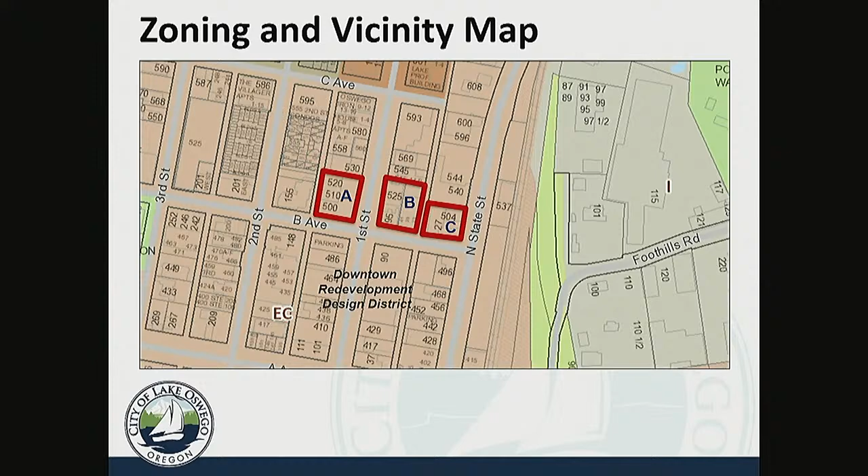Properties in this location have been identified by the city for a redevelopment project for many years. Back when the Lake Oswego Urban Design Plan was originally developed, it called for a convenience commercial district along this area of B Avenue with a mix of retail, office, and residential uses. That's evolved quite a bit since then, but we have a lot of language related to projects of this nature in the East End Redevelopment Plan, which we'll refer to as the EERP moving forward. That includes several conceptual projects that would be addressed with this proposal.

Project H is known as the 1st Street North Anchor Redevelopment Project in that plan. There are also projects that include a State Street mixed-use development as well as a hotel development within this area. There's been some stops and starts with different RFPs here at the city on this particular site, but we have a current proposal to discuss tonight.

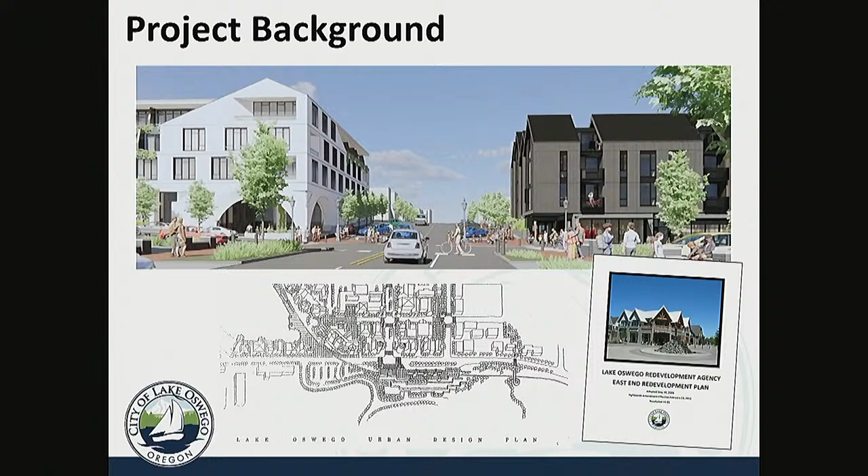So the project includes the following components: a development review permit for an approximately 131,000 square foot mixed-use development across 3 buildings on 3 separate parcels, consisting of hotel, restaurant, retail, and residential uses.

On parcel A, there's a 5-story hotel with 70 rooms, a restaurant, and on-site and on-street parking. On parcels B and C, there are 2 buildings, one in each parcel. The 5-story building is on parcel B, and a 4-story building is on parcel C. Those have 66 residential units in total with retail and restaurant uses as well as on-site parking.

Multiple design variances are being sought as part of this application, really to address multiple site constraints, intended to produce a more well-designed active streetscape given that condition on the site. We'll discuss a lot more about the variances later. In addition, they're requesting 12 trees for removal.

The original request was for 14 trees, but one tree was identified as invasive and will be removed under a separate permit, and another tree was found to be less than 6 inches in diameter and doesn't need a permit to be removed. There will be a total of 154 parking spaces between on-site and on-street parking, several of which would be provided through a mechanized parking matrix, which the applicant is also requesting as part of this variance request. More on the variances later in the presentation.

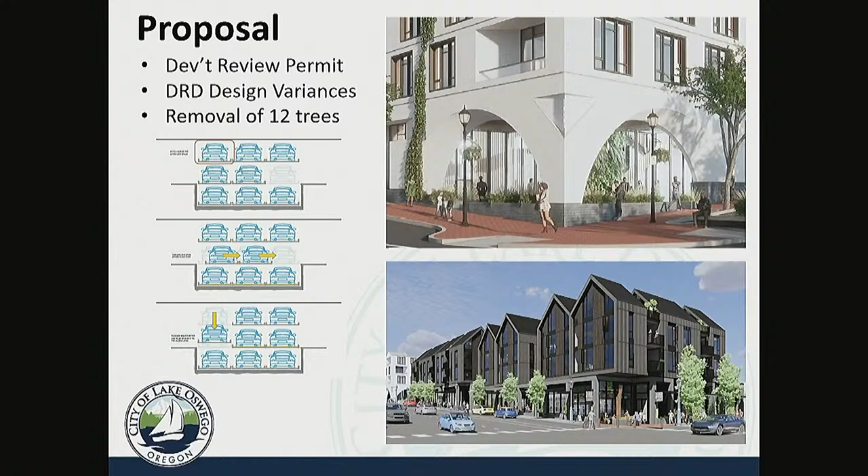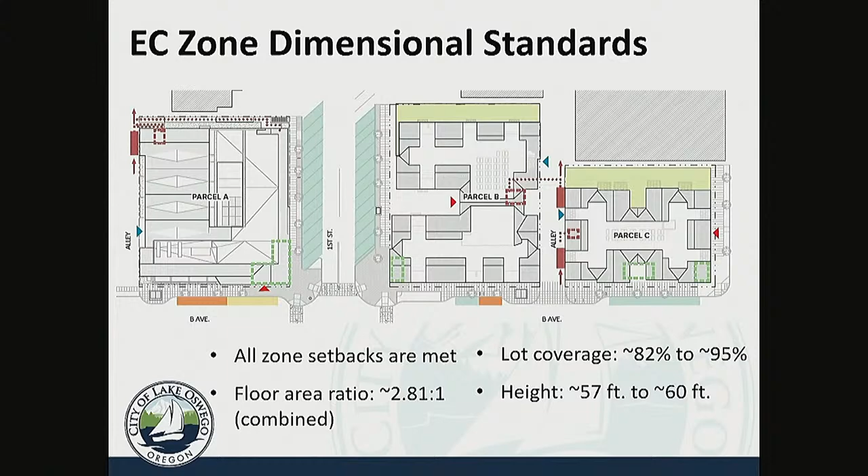The unified site is zoned EC, which has no required setbacks. Lot coverage in that zone is 100%, and the lot coverage for this proposal ranges from approximately 82 to 95 percent. The floor area ratio maximum in the EC zone is 3.32 to 1, and the proposed overall floor area ratio across the 3 parcels is 2.81 to 1 — that's the average, though it can be broken down per parcel. Building heights range from 57 to 60 feet depending on the parcel, with 60 feet being the maximum height in this district.

The proposal includes 3 new driveways, all accessed from alleys and compliant with access and on-site circulation standards for emergency access, slope, cross slope, and landings. There's ADA compliant pedestrian circulation between interior uses and exterior spaces, and voluntary dedications of additional right-of-way space with upgrades to the public sidewalk.

So this addresses the development standards really quickly. We'll go more into the dedications later. Stormwater is proposed to be managed on site, and the applicant is also proposing new crosswalks and curb extensions at the intersection of 1st and B Avenue.

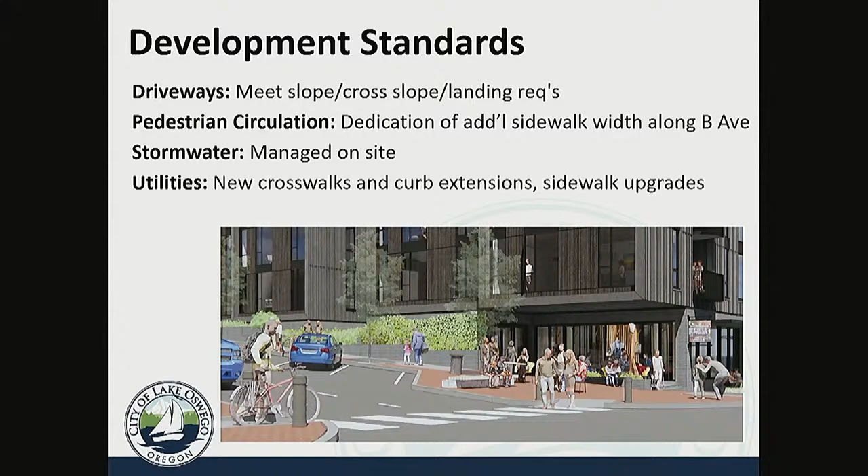I wanted to quickly remind folks that the applicant submitted revised numbers for the number of parking spaces provided, so that should be accounted for in the numbers I'm discussing tonight. That's mainly a revision to the numbers on parcels B and C. I'll go over those in a moment, but those were addressed in exhibits E46 and F15.

On parcel A, which includes the hotel development, there's a minimum of 63 parking spaces required. They provided 64 spaces, 47 of those in a matrix system, with the others provided off-street.

On parcels B and C, they proposed 90 spaces, with 87 spaces actually required on those 2 parcels. Those would be 53 garage spaces, 14 off-street spaces, and 23 within the matrix system itself.

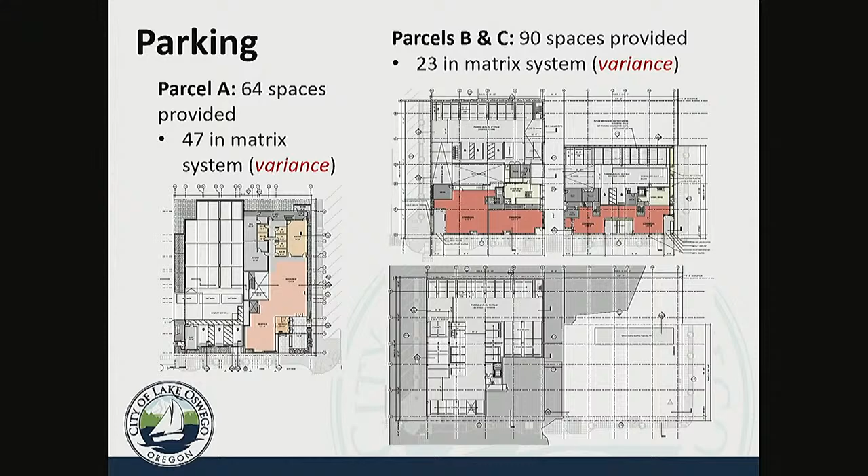In terms of street improvements, the applicant has proposed to dedicate an additional 2 feet along parcel A, resulting in a 10-foot wide sidewalk, and an additional 4-foot dedication on parcels B and C, resulting in a 12-foot sidewalk, going up to 15 feet along the State Street frontage. There's a required setback of 3.5 feet along that frontage.

The applicant is also proposing a number of pedestrian courtyards that would feature public art, benches, pedestrian-oriented plantings, trash receptacles, and bollards at the corner of State and B.

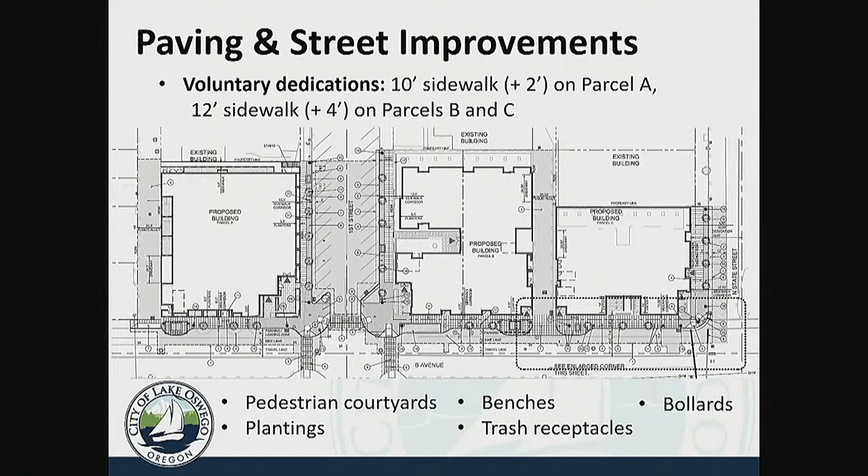On the next 3 slides, I'll go over the downtown redevelopment design standards. I'll try to note when a variance is requested, but we'll directly cover those in detail later in the presentation.

This first section covers building, siting, and massing, the first slide of the DRD standards. One thing you'll note is that the applicant has taken different approaches on parcel A versus parcels B and C. There's a unified design on parcels B and C that addresses the criteria somewhat differently than the proposed hotel development on parcel A. I'll try to do my best to delineate between the two.

On parcel A, the applicant has proposed a 5-story building, which would require a variance. They've included a strong corner that's articulated and highlighted by an archway at the corner of the hotel building.

On parcels B and C, there's again a 5-story building proposed on parcel B, and only 4 stories on parcel C. But those corners are similarly activated by public courtyards, taking a different approach to highlighting the prominence of the corner by using public art and activating that streetscape in general.

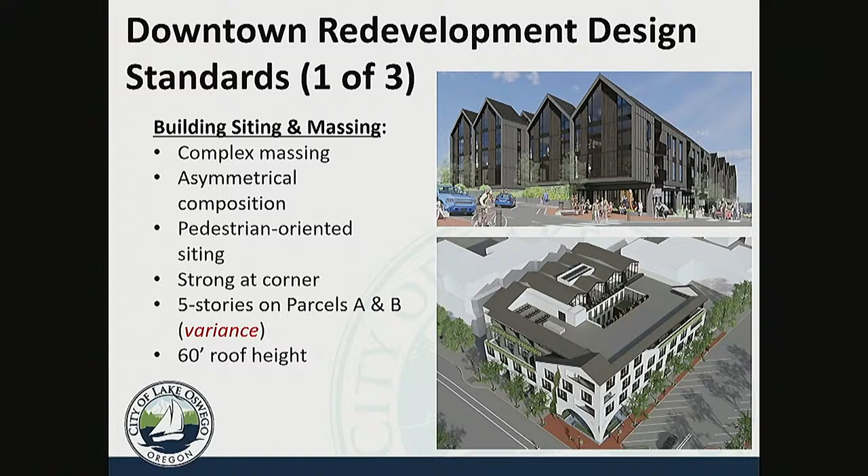In terms of building design, on parcel A the hotel is designed as somewhat of a modern interpretation of the arts and crafts style, something the applicant will speak more about later. We found that the proposed building on parcel A has an architectural form that mimics a steeply pitched gable roof, creating a sense of the roof sweeping down closer to the ground on one side than the other.

There's an asymmetrical composition used in the hotel, a contrast between a rectangular building form and a sloped, projecting building form emerging from that rectangle. It also uses a round arched opening to mark the entry to the hotel, another characteristic element of arts and crafts style. In terms of the mixed use residential and retail buildings on parcels B and C, those were designed in another interpretation of the Oregon Rustic style.

So that uses multiple moderately pitched gable roofs that are articulated with A-frame-like facades, as you can see in the image.

It's an asymmetrical composition on the plan view. It's kind of H shapes that are not necessarily symmetrical in their orientation, responding to the topography and providing different experiences to the pedestrian.

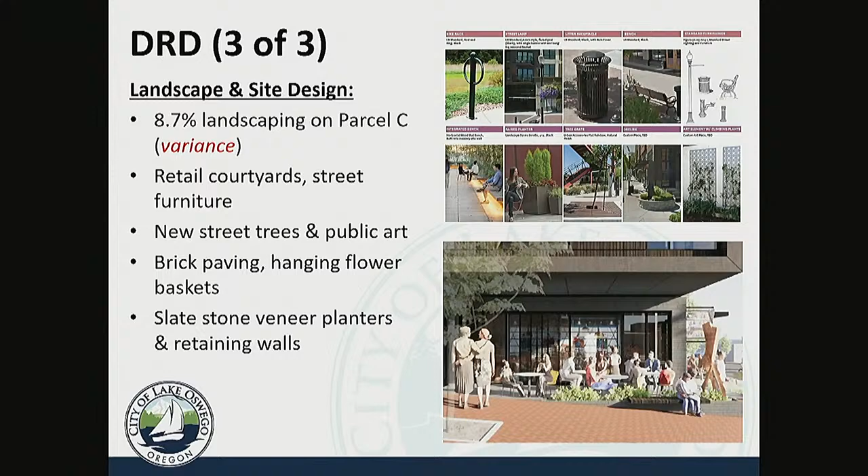All right, so now to get into the variances requested by the applicant. These are, sort of the 5, we'll focus on 2 of those to start with. These are variances that are subject to the general design variance criteria, a bit different than the ones subject to the DRD specific design variance criteria, which we'll talk about next.

So these first 2 variances: the first one would be a reduction in the required landscaping on parcel C. I had just mentioned that would be 8.7% provided. The second one would be the use of a mechanized parking matrix system to provide required parking spaces.

I think one commonality that ties these issues together, or one thing that led to these requests that is the same for each, is that there's a bit of a difficulty they've found with producing a design that really highlights the city's desired program for the North Anchor site and the vitality of commercial uses, the prominence of the hotel, while still working within the constraints of the site, the size of the site, and the topography of the site.

So those are 2 things that really influence these requests for variances, and I'll get into a lot of the other arguments next.

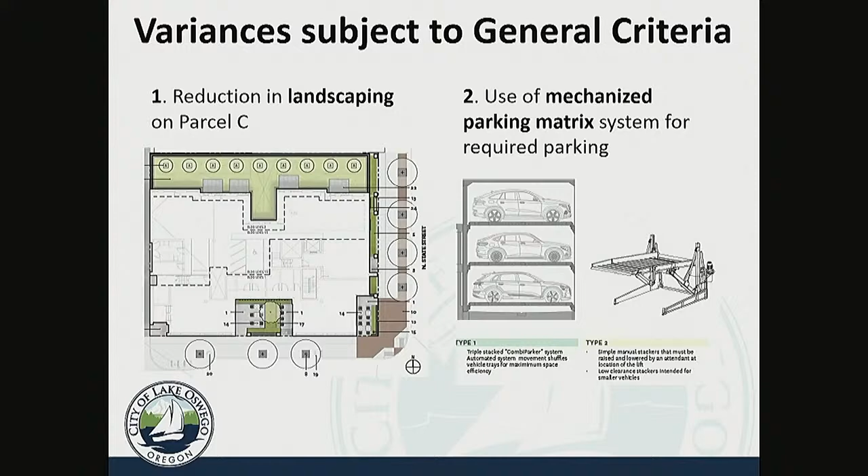So we found that both variances met subcriterion A2, which is essentially that they better accomplish the purposes, goals, or objectives of the base district and any adopted plan or overlay district. The East End Redevelopment Plan, or EERP, contains a number of objectives designed to ensure economic vitality, encourage intensified residential housing development, improve the pedestrian shopping environment through street landscaping, and has other objectives carried forward in other parts of the project, including Project J for the North Anchor development, conceptual ideas for a mixed-use project and retail along State Street, and a hotel project.

So we found that the variances better accomplish those particular goals by prioritizing the density needed to fulfill the vision in that plan and other urban design plans developed for that area. The design on parcel C emphasizes street landscaping, as you can see in the design of the State Street frontage here, using canopy-like plantings to screen the parking behind and encourage a more active streetscape, considering they needed to fit the parking somewhere in the building. That seemed like the best way to handle it while still producing an active and vital streetscape.

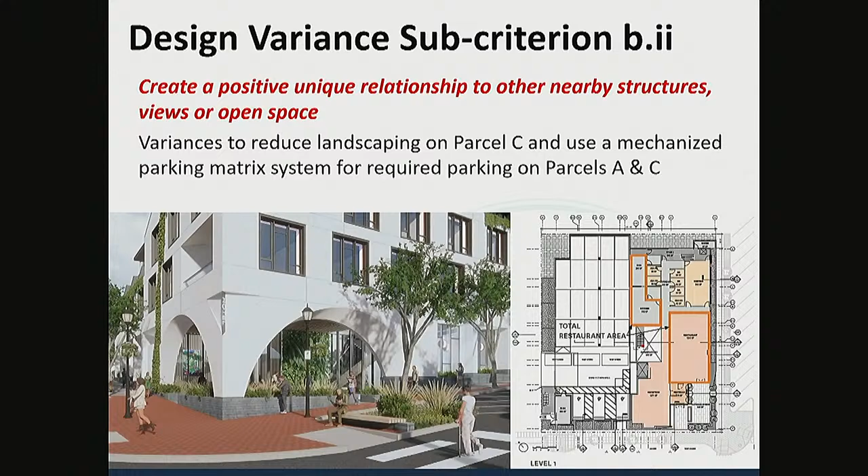All right, and so that covers the variances subject to the general design standards. So I'll move into the variances that are subject to the criteria within the downtown redevelopment design district. It's a bit different.

This covers the request for 5-story buildings on parcels A and B, the reduction in storefront appearance related glazing requirements on certain frontages of each of the three parcels, and there's also a request to allow the use of stucco on upper stories of parcel A, the hotel building.

So again, a lot of these design moves are really to accommodate the desired mix of uses and program envisioned for the site. Considering that it's a relatively small site with a considerable amount of topographical grade change, you can see even in this slide a significant jump in height along that B Avenue frontage of the Parcel A hotel building. That creates a bit of a challenge for some of these issues.

So generally these are attempts to respond to the site, trying to make it as active a use as possible while still fitting in with the downtown environment and maintaining that rhythm of the streetscape.

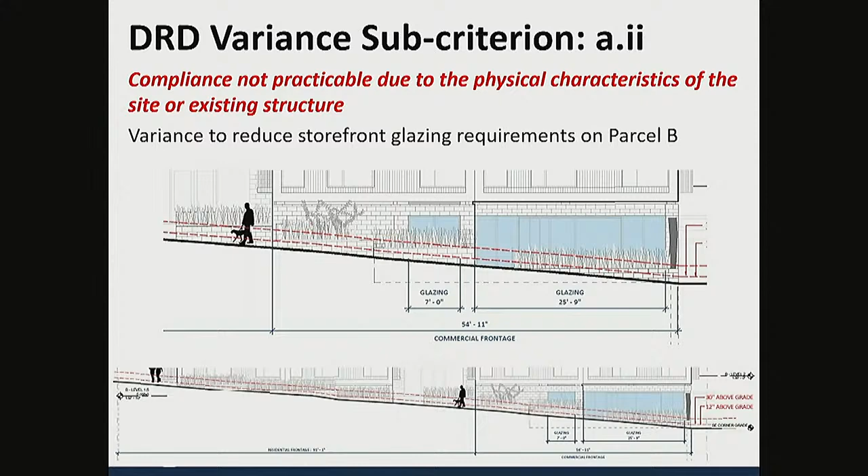For the other requested variances, we thought the best argument was that they really better accomplish the objectives of the EERP as well as the urban design plan. Again, we're talking about the variances to allow a 5-story building, reduce the glazing requirements, and use stucco on the upper stories of the hotel in particular.

As we've mentioned before, this allows for a sculpted massing that opens up certain views of Mount Hood. The 5th floor in particular opens that up for guests of the hotel, and there's also a walkway on the northern portion of the site where additional views can be had.

It also provides active hotel uses along prominent frontages and increases the vitality of the district by providing that distinctive building form I was gesturing about earlier. It really tries to allocate the FAR allowed within the district and height limit in ways that maximize active use along the pedestrian frontages.

The storefront appearance variance also screens the parking garage and allows a higher density of uses. These work together in certain ways to make sure it can be an active use for the hotel and really encourage that storefront vitality.

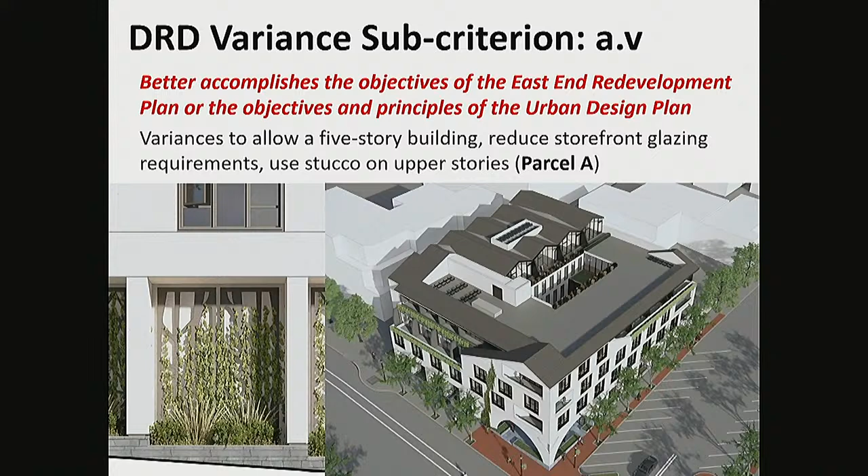When it comes to parcels B and C, we found that they better accomplish the objectives of these plans in various different ways. So the 5th story on parcel B, we found that's really able to allow a certain building form, and by using the site the way that they have, and by using that 5th story, they're able to get a much more reasonably sized ground floor on the B Avenue frontage.

The applicant has a few diagrams that show what would occur if they were to produce just a flat 4-story building within the height limit, which could reduce the pedestrian storefront height quite a lot. So it does produce a more intimate and appropriately scaled storefront experience, and it directly addresses some of these objectives to support the creation, as stated in the EERP, of a 24-hour downtown with a high level of activity.

A lot of this has to do with the specifics of how we defined a story in the development code. There's a significant slope on the site that creates a condition in which the vehicle and service areas can tuck into the higher end of the slope, allowing daylighting of the retail spaces along the B Avenue frontage. The variance would allow for 4 stories of residential units while still having parking underneath it on the upper portion of the site. So it might not actually read as a 5-story building except in very unique, isolated areas of the property.

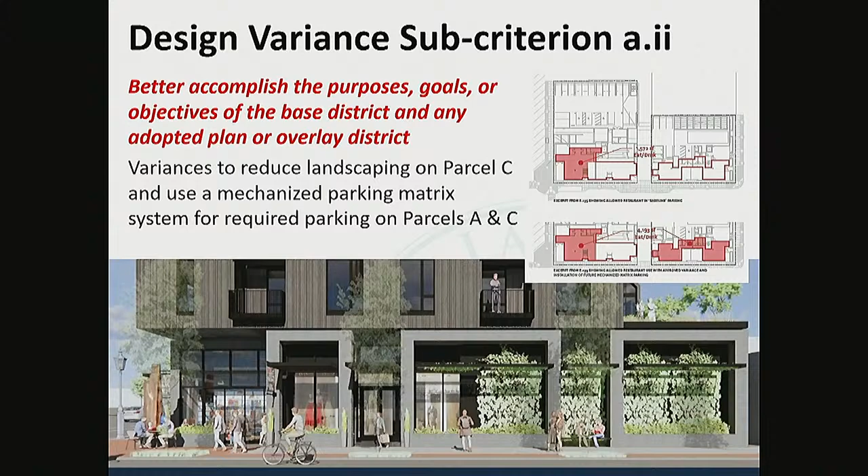There's also slate stone veneer cladding and a rhythm of framed openings that's intended to tie into other portions of the site. Those little openings and niches created in the facade are intended to contain artist-designed, laser-cut steel panels that will essentially serve as trellises for plantings to grow onto.

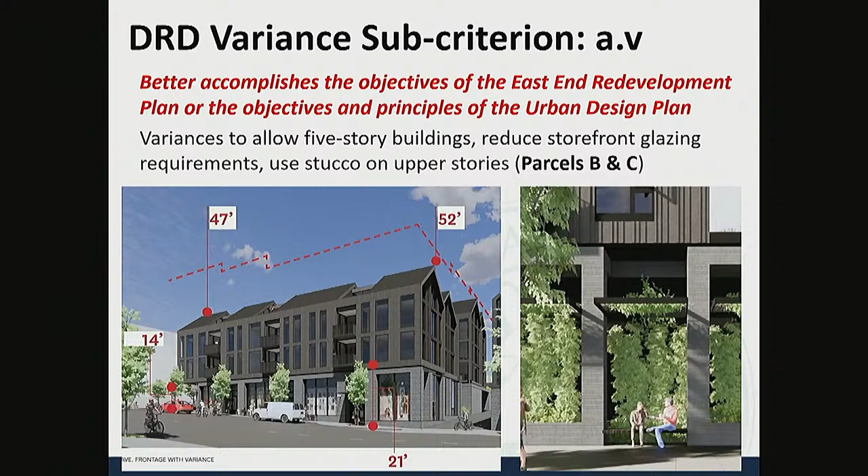For Parcel A, going back to how we found that it complied with sub-criteria B1 and B2, the proposed variances created a positive, unique relationship to other nearby structures, views, or open space and streetscapes, and they're exceptional in the quality of detailing, appearance, and materials. The variances accomplish this for many of the reasons already discussed. The 5th story responds to the topography and creates new views that contribute to the asymmetricality of the proposed building.

It also has a voluntary setback, pulling back 10 feet from the northern property line, with the idea of maintaining views for the existing neighboring building at 555 2nd Street of Mount Hood. So that's designed to be a bit more sculpted to the unique environment of the adjacent properties, creating that positive, unique relationship to nearby structures and preserving views from adjacent buildings per the variance criteria.

The storefront treatment along B Avenue in the hotel really activates the streetscape with similar types of metal, cut-steel landscape trellises. Similar to what you see on State Street, those screen the parking behind it in order to allow for a hotel ground floor configuration that locates the most active uses on the corner. So instead of windows that would just look into the parking, they provided more landscaping and artistic features in these areas.

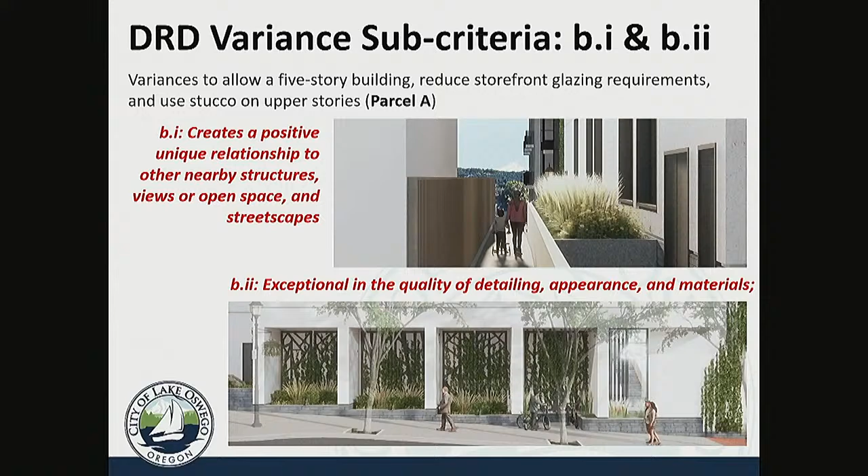So I'll close the variance discussion with a brief overview of how the proposal on parcels B and C addresses these same criteria. We found that the fifth story produces a more inviting retail storefront height in response to topography along that B Avenue frontage, in the most successful way they probably could in this circumstance. It helps produce a higher quality design by creating a ground floor height that allows for an enhanced pedestrian environment along that prominent frontage. Without that, it would either be an oversized ground level at the lowest point along B Avenue, or a very tall or very small frontage, depending on the design. So this is somewhere nicely in between, hopefully.

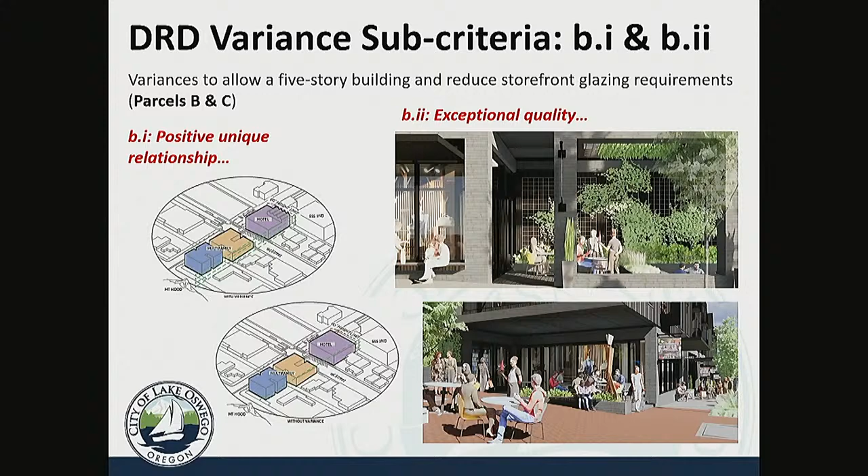Again, the screens used on that State Street frontage are similar, with laser cut panels that will allow shade to pedestrians. They're actually vertical plantings designed to create a canopy in and of themselves. So there will be landscape and art on that frontage, similar to treatments elsewhere on the site.

To go over tree removal quickly, they needed to remove 12 trees for on-site construction and sidewalk improvements. It's a constrained development area, so there were no reasonable alternatives. There would also be one invasive tree and one small tree shown on the plans that would not formally need to be part of the proposal as approved.

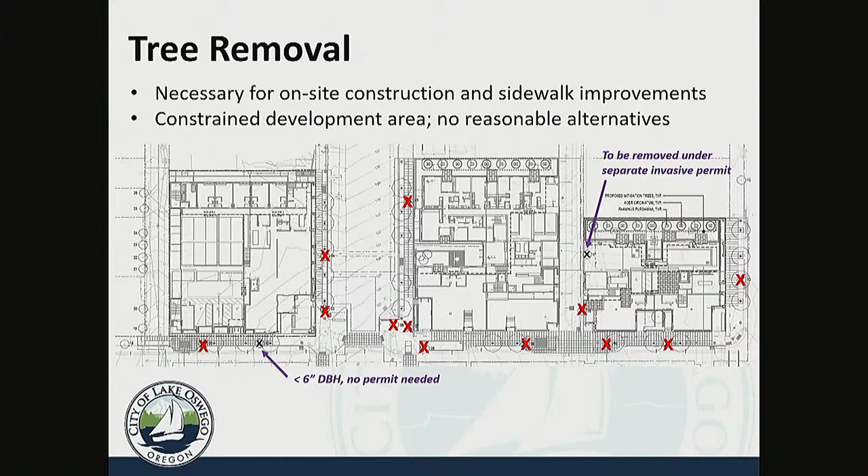And so that should cover it. The recommendation from staff is to approve as conditioned. Thank you, Eric. Are there any questions from the commission to staff?

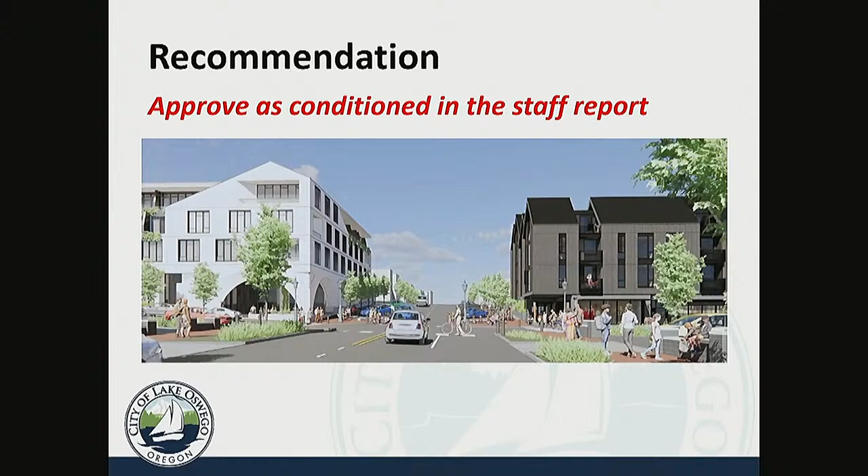What are the peak heights along the roof line of each of these, and what are the acceptable limits? They have obviously a number of peaks, so there are different heights. The tallest of them is 60 feet, the way we would judge it, but there are a few that get pretty close. There might be more than one peak at 60 feet in height, but it is right at the maximum.

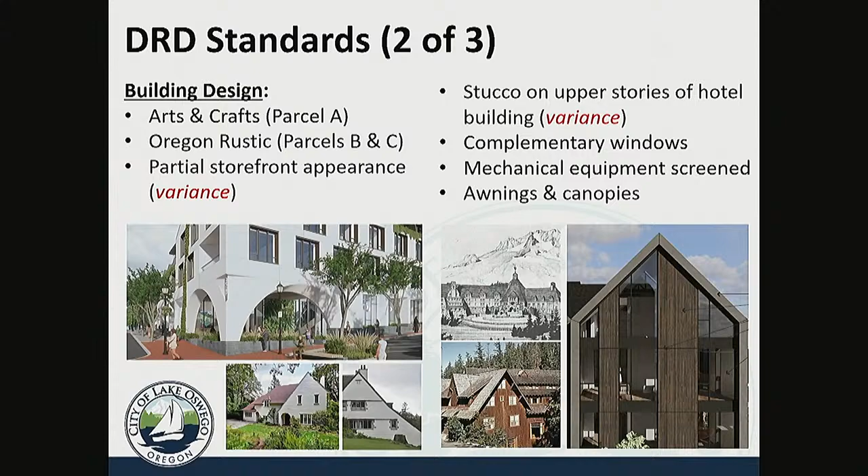Yeah, that's something the applicant might be able to speak to more regarding their inspiration and how they drew that connection to the arts and crafts style. I'd say the use of arched openings is a pretty prominent feature. There are images showing some fairly prominent local examples of arts and crafts buildings, like on the bottom left of this slide, where they utilize that steep pitch and the idea of sloping down from that pitch, with the pitch projecting from another building form. I think that's really the type of arts and crafts building the applicant is seeking to create. There's a lot in the code that would prevent this particular interpretation of arts and crafts that's included in our appendix as examples, because the DRD requirements would require different materials on the upper story. So the idea is to create a more unique interpretation of that arts and crafts feature, one that's still a prominent version of what people typically mean by arts and crafts buildings, which wouldn't be possible otherwise through the DRD code.

In terms of color, it's worth noting that it is lighter than many of the buildings nearby, including the other building on parcels B and C, and I think that was a deliberate decision. There's certainly a lot of abstract inspiration, as you alluded to, with the mountains and the idea of being carved out of a large form, which the applicant would be the best party to speak to further. But as for the arts and crafts portion, I can say it's a unique interpretation of that style. That's what we saw, but we were able to see the inspiration for it and its connection back to a lot of prominent examples of that style.

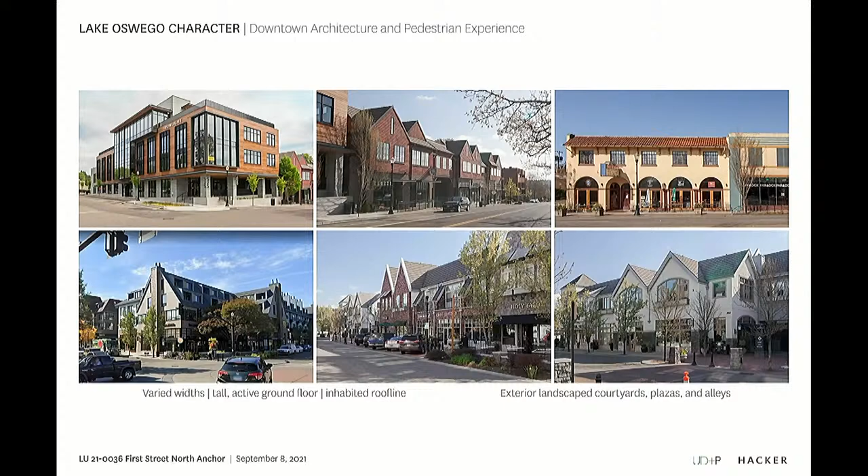Many of the buildings have tall, heavily glazed ground floors that promote very active pedestrian streetscapes, usually around a 14-foot to 20-foot tall ground floor reading - so a very nice public scale, but not overly sized. And then sites are punctuated by a variety of outdoor seating spaces and landscape courtyards, plazas, and alleys.

The buildings work together to reinforce and complement some of the existing patterns of the district, particularly the ground floor architecture, to create the most engaging pedestrian experience we can on the site.

I'll touch on this quickly - I know some of this was already covered. The right-of-way improvements in general include significant improvements on all frontages, in efforts to bring the level of pedestrian safety, activity, and the general character of the sidewalks to the same level as you see in some of the more redeveloped areas of downtown, particularly around A Avenue and First Street and the Windward and Lakeview Village. This includes widened sidewalks, new street trees at a denser spacing, bulb outs at intersections and alleys for pedestrian safety and furnishability, and specialty inlay paving along First Street.

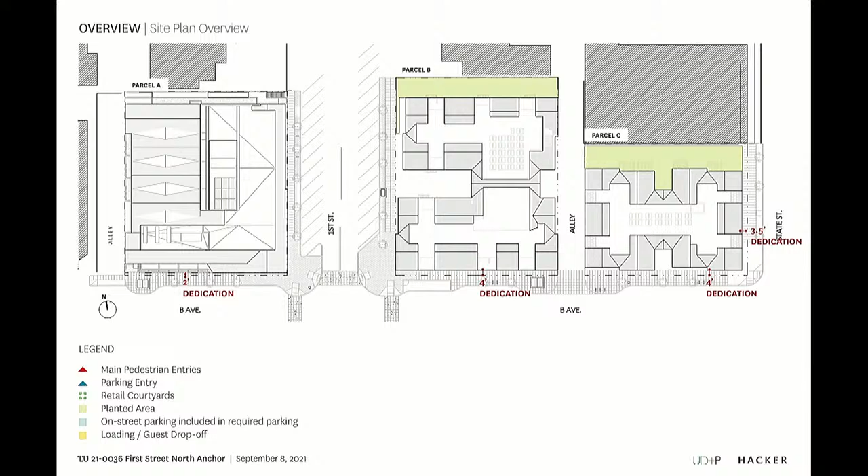This ground floor diagram shows that we tried to locate program to activate all the pedestrian frontages with commercial storefront and active plazas and courtyards. At the northwest end of the site, shown in blue, we represent ground floor residences, landscaping, and terracing landscaping adjacent to the sidewalk.

We're providing structured parking on site for all the parcels, and we've carefully located the parking and building services to be accessed off the alley and away from the pedestrian frontages as much as possible. Due to the grade change, these parking garages are buried at the north and northwest ends of the site.

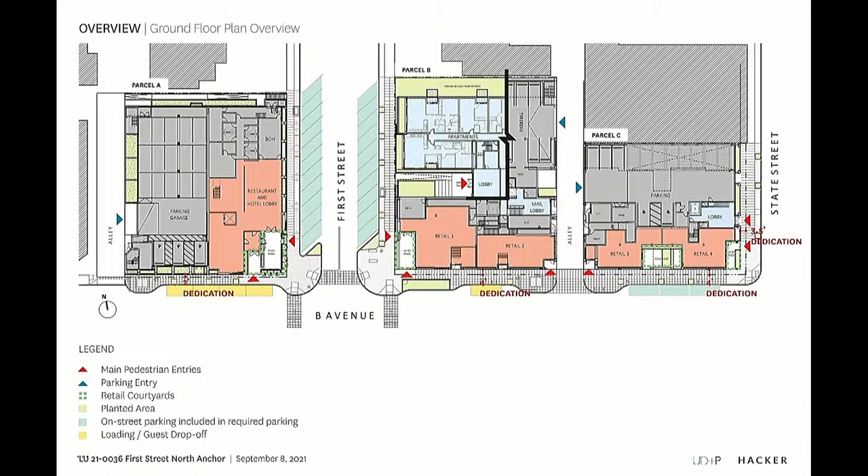Those levels actually daylight as full stories at the retail along B Avenue, so we've lined that with retail space as much as possible. The two exceptions are a portion of the hotel facade along B Avenue and a portion of the State Street facade on the far east. In those locations, we're utilizing a mixture of specialty landscaping and art screening, which we'll talk about later.

The architects who invented and authored this style were looking for something new, an architecture they believed had more meaning, authenticity, simplicity, and utility. Importantly, they held a strong reverence for nature, community, and family. The buildings were often where the public could come together, congregate, and admire our country's most impressive natural surroundings, and the architecture was intentionally designed to harmonize with and fade into those surroundings.

Given the remote sites these buildings were built on, they were often intentionally utilitarian and efficient in floor plan, material, and detail. One hallmark of the style is authentic use of plan and structure - an efficient floor plan laid out on a rugged site to best take advantage of views often had the visual effect of asymmetry in the form, another hallmark of the style. Similarly, varied roof lines provided weather protection, but more importantly reflected authentically the scale and use of the rooms within.

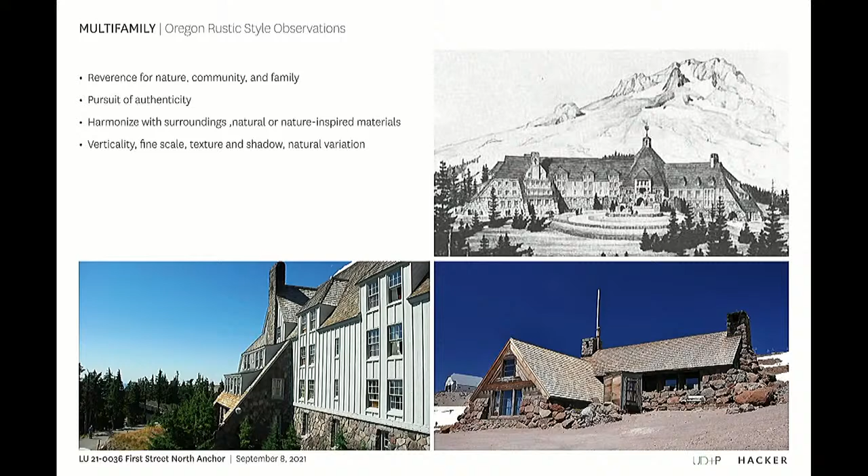Both multifamily buildings are utilizing a similar architectural style. However, we've varied the orientation of the roof lines and the courtyards to allow them to uniquely respond to the topography and create a variety of pedestrian experiences at each street.

The overall material palette of the building is directly inspired from Oregon rustic architecture, with warm neutral colors for the upper floors and natural tones. Upper materials are primarily a tightly spaced fiber cement board and batten siding with black commercial grade vinyl windows, and at the gabled ends, the rich color of stained true wood siding. This unique, tighter spacing of the battens provides a modern take on the texture and fine scale reminiscent of the historic residences and industrial buildings of the Oregon Iron Company, as well as the board and batten siding of Timberline Lodge.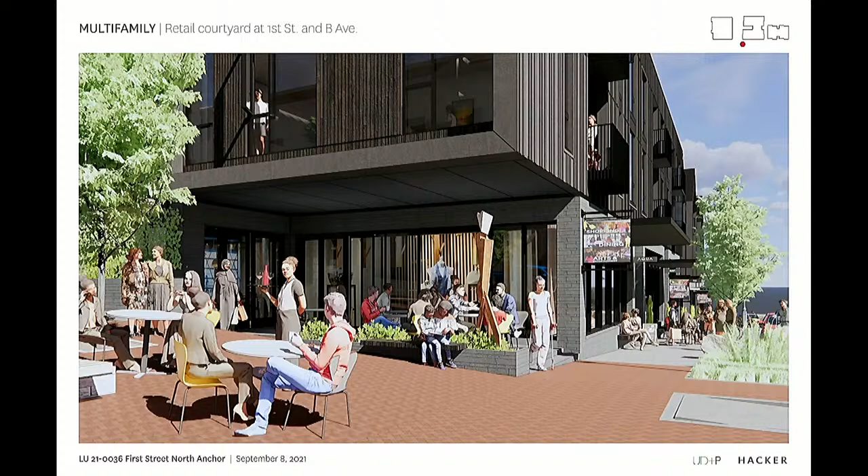Apologies, I skipped forward one slide.

This shows the retail courtyard at the corner of First and B, and we have a similar courtyard at all the primary intersections. With this grand architectural gesture, we're providing all-season outdoor seating adjacent to the retail that's open to the sidewalk, but under the cover and protected from above by the building.

Here we're showing a low planter with integrated seating on the public side, and a sculpture at the corner, which maintains openness and visibility to the courtyard but holds the corner and allows a transition between the sidewalk grades.

At the corner of State and B, we're providing a similar courtyard but at a different scale, as you can see here, just due to the grade change. Between these courtyards, they're connected by a rhythm of stone frames, storefront windows, and secondary retail entries, which continue all the way from the southwest corner at First along B Avenue and wrap the corner for the entire frontage of State Street.

It's important to note that the variance on Parcel B for the number of stories is allowing us to maintain a 14-foot to 21-foot ground floor height, which is consistent with patterns within the district.

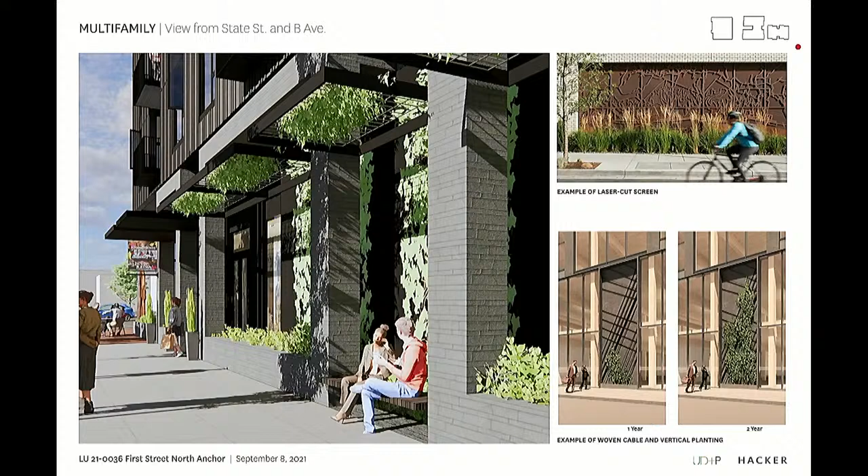And with that, I'm going to hand off to Scott Barton-Smith to describe the hotel.

It looks like we have very little time. May I take a few more minutes beyond the 20 minutes? Sure, go ahead. All right, appreciate that. Take 3 or 4 minutes more. You had trouble at the first.

All right, I'm Scott Barton-Smith, and I'm going to give you a tour of our proposed design for the hotel. Hopefully this will answer some of the questions that came up.

When we were thinking about a hotel, it is intended to cater to visitors to your community. And therefore, it really wants to be something that is readily identifiable and locatable for visitors that are just rolling into Lake Oswego, say from State Street or from the South Anchor.

Another way to say that is a hotel really wants to be an extroverted building, in that it wants to feel natural in its community, but also wants to stand in contrast somehow to its surroundings. So when we started to think about the design of the building and to look into the planning requirements, we were trying to find a way to make an extroverted building in the hotel.

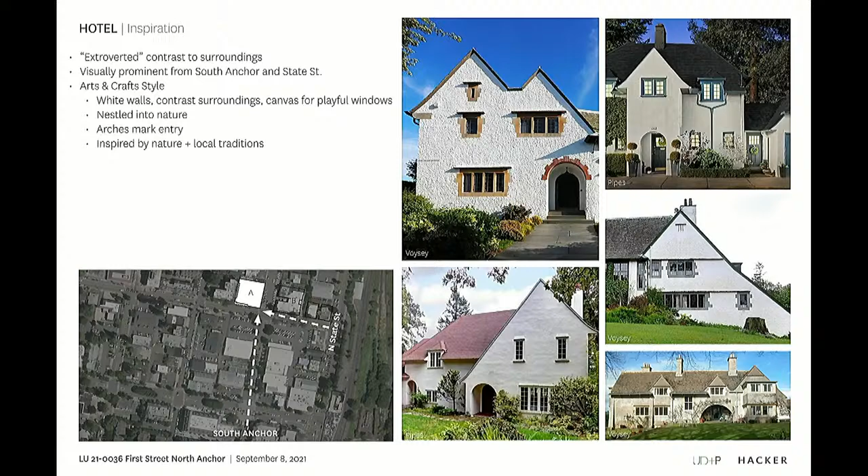So that seemed very appropriate for our hotel building. The other aspect that we really liked about arts and crafts was that it was inspired by nature and local traditions. We love that because we find that buildings are always better when they give people a connection to the landscape and a connection to the community that they're within. So when we're thinking about the arts and crafts building, we're also thinking about a connection to landscape and a connection to Lake Oswego.

When we're thinking about a contrasting material for the roof and for the stone veneer at the base of the building, we're also thinking about the geology of the Willamette Valley and basalt.

When we're thinking about that concentration of detail that the arts and crafts architects like to do at the openings of the building, we are thinking about the local traditions. As Chris mentioned, the lumber industry that was historically here in Lake Oswego and the iron industry. So we're seeing a concentration of detail at the windows that brings warmth of wood and the contrast of dark metal.

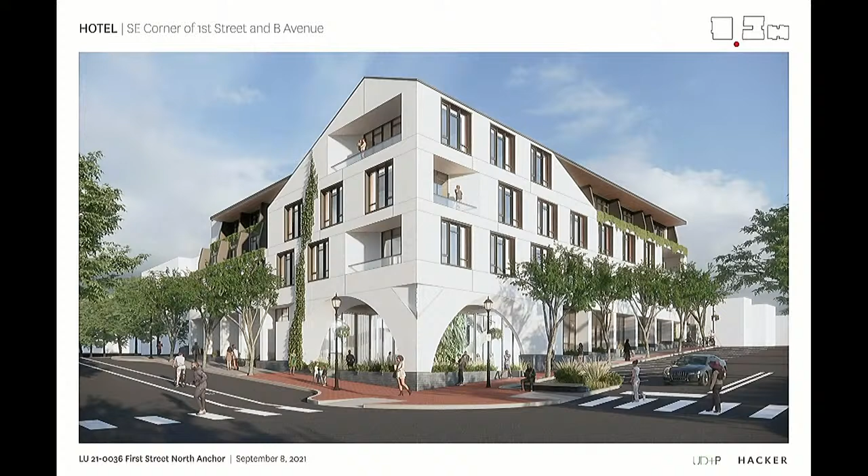And so this is probably the most extroverted corner of the building. This is from the southeast corner. You'll notice a mountain motif here in the white stucco that really culminates at the corner and is really anchored by these entry arches at the corner of B and First.

You'll also notice that the upper stories, although they are all stucco, are recessed with balconies. The intent of the upper story material change in the code is to soften the upper stories. We believe we're achieving that better by literally setting back upper stories, which allows them to recede in space and really focus attention on this mountain motif in the corner.

Some other things you'll notice from this image is that the ground floor windows are set deeply into alcoves that are landscape planted. The arches and the balconies within that mountain have beveled surfaces. All of that contributes to making the white stucco feel more than a 2D surface, making it feel like a thick surface, like a carved object, as you mentioned, Mr. Smith.

You'll also notice that the windows are organized not in a grid, but in a staggered pattern that kind of points towards the peak of the mountain. So it was really important for us to introduce those staggered window patterns.

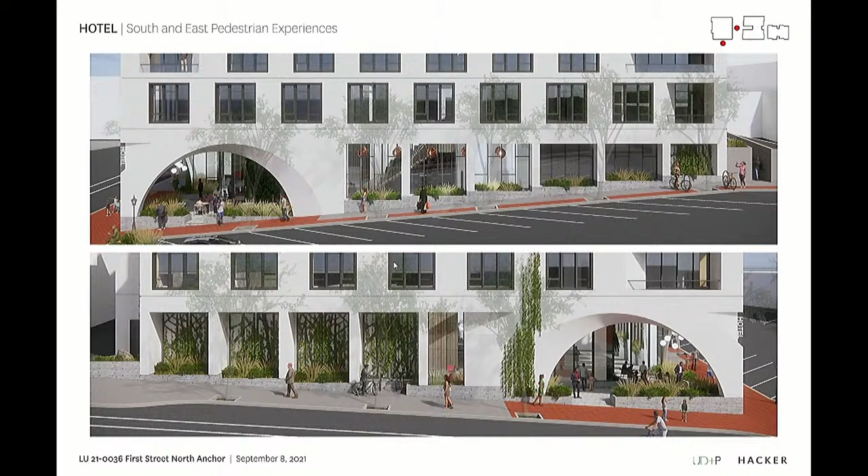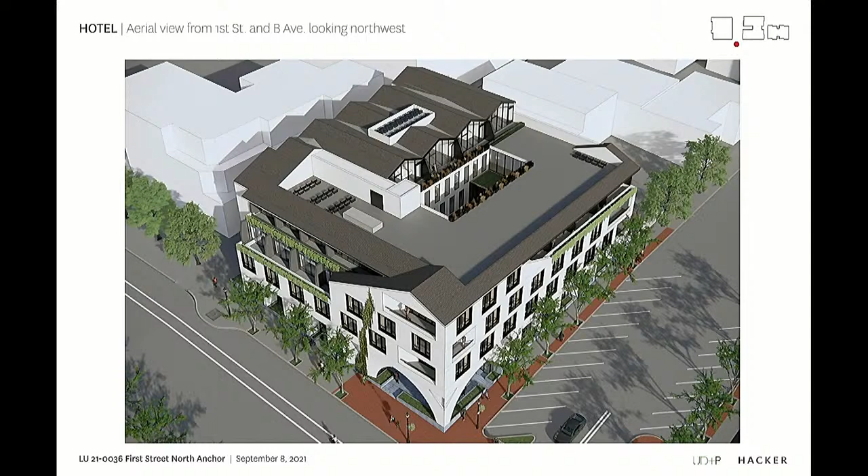This kind of angle is generally where you can best see that fifth floor, because we've designed it in such a way that the pedestrian experience has a 4-story reading no matter which side of the building you're on. And that's because we're stepping up the hillside. You can see that a little bit better from this angle.

The property line is actually where this wood fence is. And so we think about the partial fifth floor that we're requesting as a reallocation of space that we would have built in that 10-foot setback, but actually removing it from the north side and putting it on top of the building. And that has several advantages.

The first advantage is that there's residences. The 555 Second is behind the building to our north and west, and this partial fifth floor screens the mechanical that you can see on this edge and over here from those residences.

The second advantage is that, as Eric mentioned, this voluntary setback on the north side actually preserves some eastern views of Mount Hood for folks in the 555 building.

And then finally, at the bottom of that setback is a publicly accessible path which allows pedestrians a connection between the alley and First Street, which you can see here. And you can see that Mount Hood will be aligned with that view.

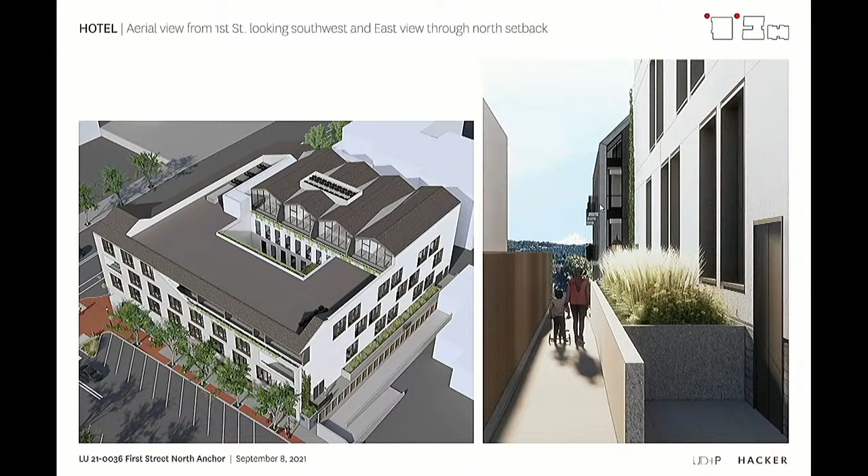This is the multifamily building across the street, so you can see that its setback contributes to that impression that you get.

If I can leave you with one thought, it's that all of the massing, articulation, and material decisions we've been making are really in support of the vitality of the neighborhood and the pedestrian experience, as well as the variances. So we're happy to answer any questions. Thanks for letting me run a little long.

Thank you for your presentation. Mark, do you have any questions? No, thank you. Kirk? Yes, sir. All right, Randy?

Thank you. I did have a bit of concern initially about the use of the concrete stucco, even though it is a concrete and not EIFS-based exterior surface.

I noted with respect to the stucco primary cladding, your documents reflect that contrary to the manufacturer's cut sheet in your materials, the stucco primary cladding system will be installed as a rain screen with a cavity between the cement board and the wall sheathing. Could you comment on that a little bit and how that makes this surface more appropriate, if it does, for the Pacific Northwest weather?

Sure. In this climate, with the moisture we experience most of the year, we find that a rain screen approach is more appropriate for most claddings. Having a space where incidental moisture can drain out of the wall tends to be the best approach, rather than having a situation where moisture gets locked into the wall. So all of the facade materials we tend to use have some kind of rain screen or drainage cavity.

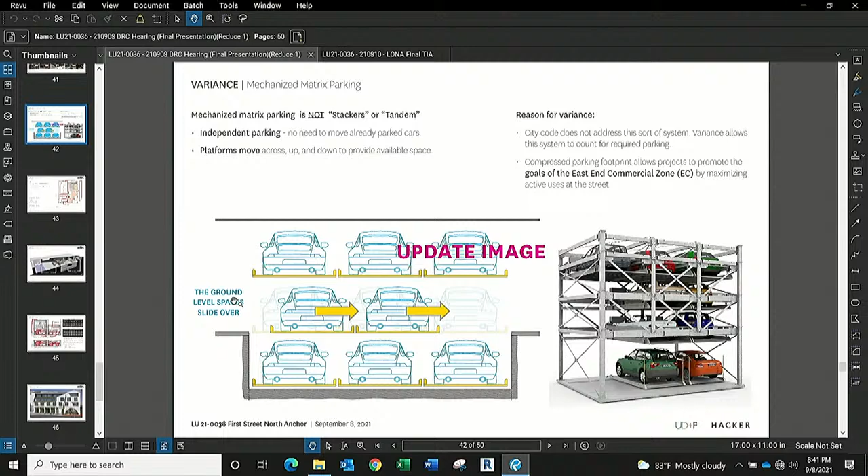I don't know that I follow you on the multifamily. Are you saying that you operate that yourself? We have, and Sarah can speak to the logistics, but usually residents can use smartphones to punch in the space where their car is. So sometimes it's actually better to let the residents use the system versus retail, but we have that flexibility.

I should clarify that the intent at the residential is that the residents of the apartments would actually control the matrix system, and we've had that experience in a number of residential buildings in Portland. As Chris was describing, it's a very automated system where you punch in where your car is or the number of your space, and the matrix shuffles and brings your car down to you.

And then I think we did want to address your question about what happens in a power outage, because we have talked about that. So in a power outage, we will have a generator in the building that can power the matrix system to retrieve the cars during an event like that. And if that fails for some reason, there is a mechanical way to extract the car. That takes some time. The generator is really the best purpose, but a power outage does not mean your car is lost in the pit.